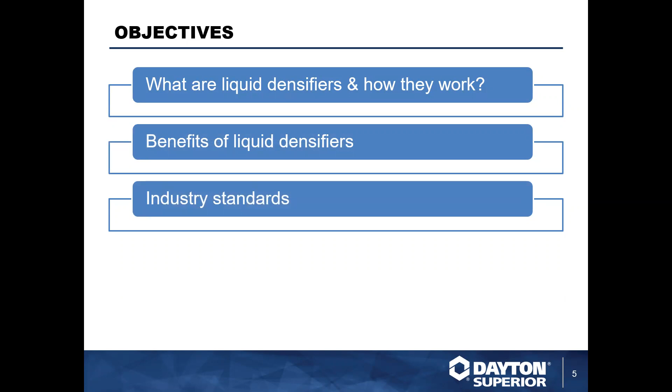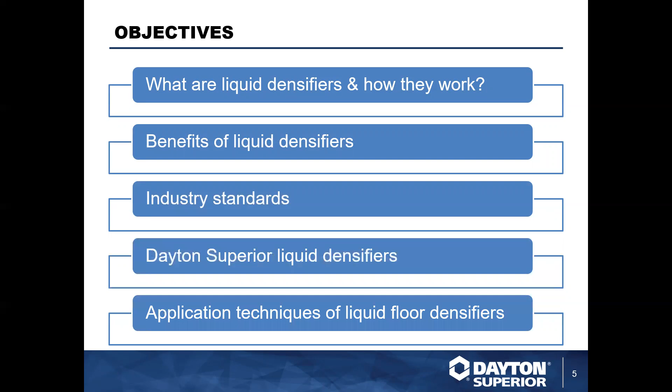We're just going to cover what liquid densifiers are and how they work, just to get the nomenclature out there and figure out what we're even dealing with. What the benefits are, and maybe compare them against one or two of the other product lines that might be out there for the same type of applications. We'll discuss industry standards briefly—there's not a whole lot of them out there, but there's some really good guidance. And finally, the products that we have that we can supply to the market to give you great solutions for your application. There are different types of products out in the market, and they have different types of applications. We're just going to briefly cover what they are so you can have a little better understanding.

So what is a densifier? At the basic level, it's a product or chemical applied to the concrete. It's going to soak into that concrete, react inside of it, and seal off the surface because we're closing off capillaries and pores. It's going to harden it, lock up a lot of the dust and prevent it from getting chalky over time. It does a really good job with exposed surfaces.

How does it work? You're going to see a lot of different silicates here in a minute: potassium silicates, magnesium fluorosilicates, sodium silicates, lithium silicates, colloidals, there's a bunch of them out there. All we're trying to do is get a silicate inside that concrete to react with the calcium hydroxide, or what some people call free lime, in the concrete. That calcium hydroxide is a principal byproduct of the original hydration of the concrete.

So if you're like, hey Matt, will these products work on brand new concrete? Yes. Will this work on concrete that's been down for 5 years? Yes. Will it be effective on concrete that's older? Yes. That calcium hydroxide is still in that concrete. It's still available, and if we introduce a silicate to it, it will react.

What it does is produce more of the spiky crystalline structure that gives concrete its strength. It soaks into that concrete, and the depth of its effectiveness depends on the porosity of the concrete. If I've got ground, open, porous concrete, I'm going to get more absorption into the concrete. If I've got a really tight troweled surface that's brand new, I'm going to use less product, but I'm going to have a really good, effective layer on top.

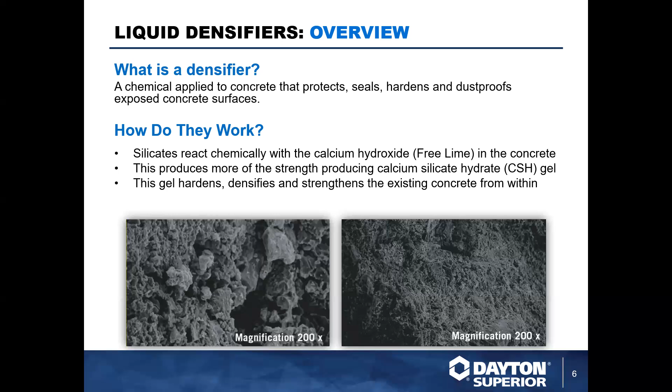As I mentioned, there's a lot of different chemistries out there. Some are a little bit older, some a little bit newer. The magnesium fluorosilicates and siliconates might be a little bit older. Sodium silicates have been around forever, sometimes you'll hear them called water glass, used in different industries. You've got lithiums that were developed in the 90s or so, and then there's a lot of colloidal silicates getting out in the market now.

Dayton offers 3 different types of densifiers: a sodium silicate, a silicate siliconate blend, and a lithium silicate. You'll see on the right-hand side the purple, green, and light blue circles in that square. This is just an oversimplified comparison, and this goes into how they're applied and why they're applied certain ways. You'll see that the potassium is kind of a big, fat, round molecule.

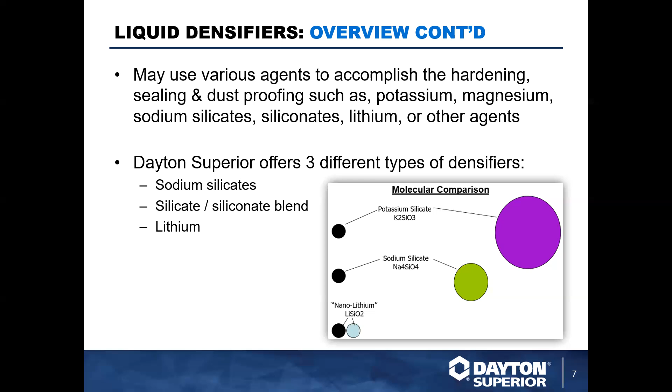Comparatively speaking, it's going to be a little bit more difficult to soak in or get into that concrete, so we might have to help it a little bit, maybe break some surface tension to work it in. Sodium silicate's pretty basic, you spray it on and it gets into the concrete, whereas the lithium is so small that it penetrates much, much easier, much better with lower effort. But that's kind of a basic level of why there are different styles out in the marketplace.

So again, concrete's a hard sponge. If you look at it at a microscopic level, there's capillaries and pores as I mentioned. If you just take regular old concrete and pour water on it, it's going to go down, diffuse, and work its way through it. This is representative of maybe a hard trowel piece of concrete. You're not getting a lot of good reflectance out of it because you're getting refracted light. Even if it's smooth concrete, you're not getting a lot of reflectance, it's being refracted because the light's bouncing in different ways.

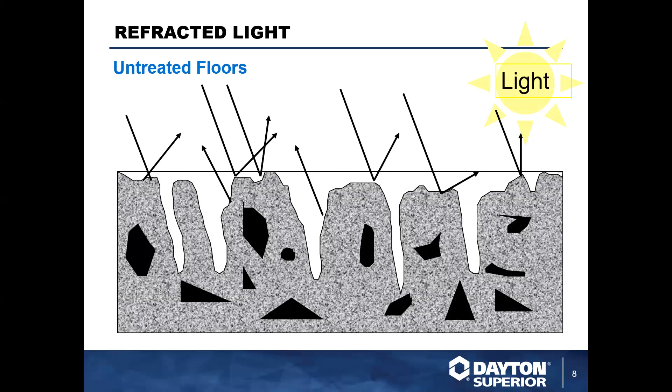The goal is to react inside of that concrete, fill all those little gaps up, and then you can even come back later and polish it, hone it, and have that light being reflected. You'll see some examples here in a little bit of a really good distinctness of image, a high shine, so to speak.

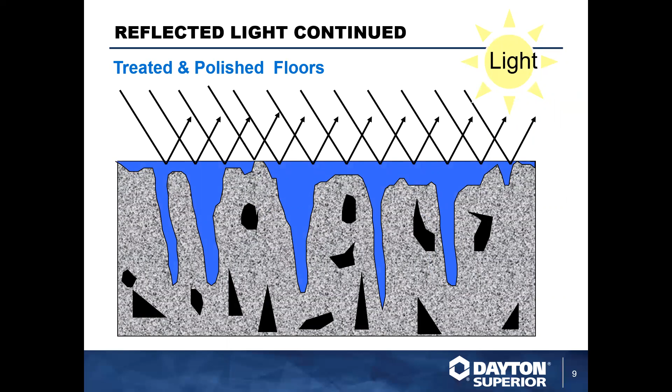What are the benefits? Why are we even using these? If you're looking at a piece of concrete or a floor that's going to be in use for a long time, there's a lot of different options for sealing concrete. Some of the basic ones are topical acrylics. They're really nice products, they get sprayed down and sit on top of that concrete to protect it. Problem is they're a maintenance issue, after a couple years they're a wear item. They're going to wear, tear, and be abused. You have to reapply them.

Epoxies are great and phenomenal, they're also expensive, and they act as a vapor barrier, so you have to have a moisture barrier underneath it, and a lot more considerations there. They're a little bit more expensive to apply and not good for all applications. Water repellents are great for outside, but are you really gaining a lot of benefit inside?

So a densifier style product really fits in a really nice niche as far as sealing and applying to concrete for internal service or application. And again, we talked about this - it reduces the porosity, so you're closing off all those pores.

While you might get some topical staining, it's a lot easier to clean. You're not getting a lot of penetration. And as a matter of fact, a lot of times you can get a really decent beading or rejection of water at the surface. Because we've got that crystalline, spiky structure giving it strength at that near surface, you're now going to be more scratch and abrasion resistant. Dragging stuff across it, you're not going to tear it up. You're not going to wear, tear, and abrade it as much as you would on a normal concrete surface.

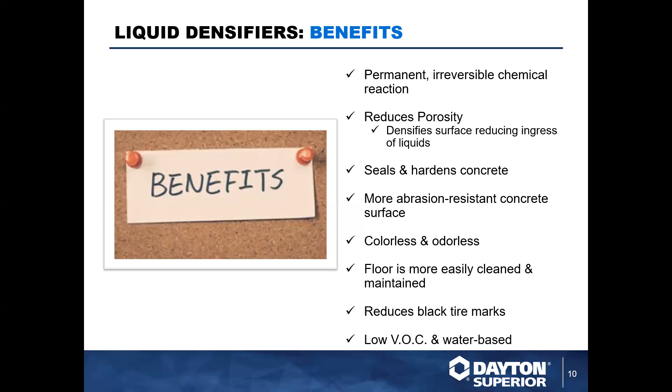I've got some pictures later on showing black tire marks. If you've got, let's say, a forklift, warehouse area, or anything with hard pneumatic tires, acrylics love to show black tire marks. So we've got a good example of that. Being that it's bare concrete, it doesn't do it as much.

So where are we using them? Warehouse floors and big box retail floors absolutely love these. A lot of the big warehouses that are coming out, especially tilt up, you're seeing them using just a straight densified floor. It makes it easy to clean, keeps the dust down, not a lot of maintenance on it.

Big box retail stores - if you walk into some of these great big stores and it's like a nice shine on the floor, you walk in, it's clean, it's shiny, you got the light distinction coming through. A lot of times what they're doing is they're specifying a good cure, they're densifying it, then they're polishing that product out. So they just got clean, bare concrete with a really high reflectance.

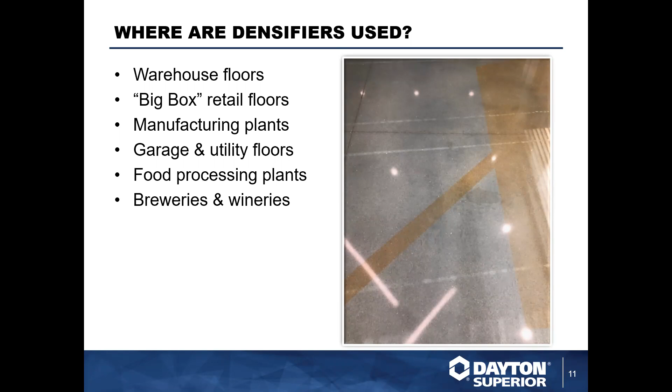Manufacturing plants, incidental food contact, all these products qualify for that. It also keeps it easy to maintain. Garage utility floors - we've had a lot of automotive restoration type places use these type of things, not as much to maintain. Also breweries, wineries, auto dealerships, schools.

And what you're seeing here is actually a school where they did a decorative finish. They had nice concrete, they went through and dyed it, stained it in a particular pattern, and then they densified it and polished it out, and it looks really good.

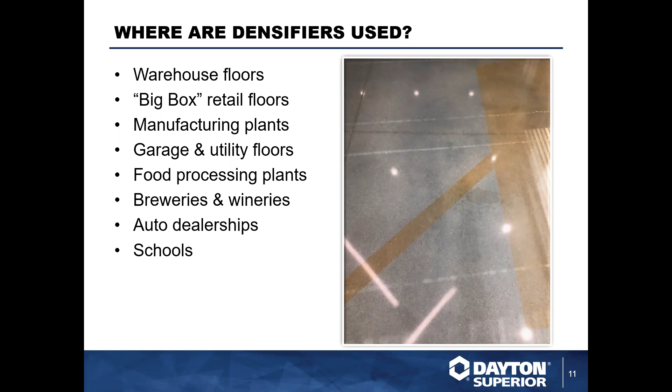And as we're talking, you'll hear me say maybe sealed or polished or honed or ground. There's not a lot of industry standards around densified concrete. ASTM, who normally does a lot of the standards and testing methods, there's no apples to apples comparison testing through them. Now, while it's actually in debate and in progress right now, it has been for a number of years - there's standards being developed, but they're not out there yet.

But there is the Concrete Polishing Council, and they put out a really nice statement saying, hey, there's a difference between polished and sealed. I can seal my concrete with the densifier and reduce ingress materials, lock up the dust, make it more abrasion resistant. But when we're talking about polished concrete, we're talking about more of an architectural finish. And that's going to include a lot of extra work between grinding, honing, and polishing that concrete, just like you would almost sharpen a knife.

Or even as sanding wood - there's a lot of, to get a mirror finish or get a high gloss finish or a very smooth finish, it takes multiple steps and multiple levels. Everything from grinding from metal bonded to resin bonded and going up your different levels of refining diamonds. There's a lot to be done there.

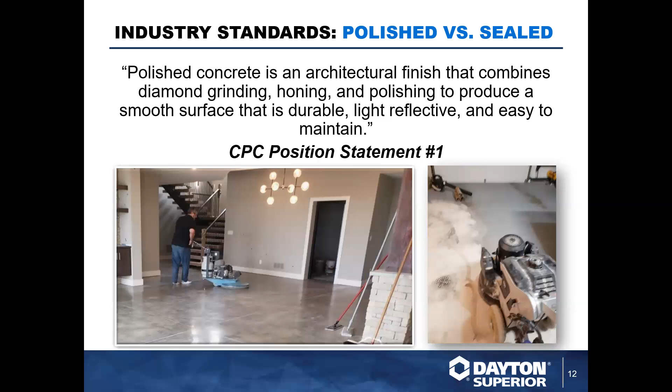The Concrete Polishing Council also has really nice standards to kind of get people talking in the correct language. Really straightforward, pretty easy to understand. They've got an exposure chart and they also have a polish chart or appearance chart. And so that way, if you say, hey, I want a salt and pepper finish...

Well, you can say I need a class B finish. And you'll see on the illustration on the left, you've got what's called a cream finish or a fine finish. That's where when you're finishing the concrete, you bring up all the cement fines. It's real creamy, smooth, and it's going to be very consistent. Once you start grinding down through that, you're going to start seeing more of the sand.

That sand is going to be more of what they'd call a salt and pepper finish. And then you'll see a coarse aggregate if you burn through all that, where they tamp down that larger aggregate. You'll see a lot of Class C finishes, especially on retrofits, where maybe they're taking a building, putting in a new restaurant or shop, and they pull out old tile, VCT, carpeting. They grind through all the acrylics and lamination down to the stone or rock, and polish it out that way.

Then on the other side, the appearance, right? Do I just want flat, clean concrete? I don't need anything crazy going on here.

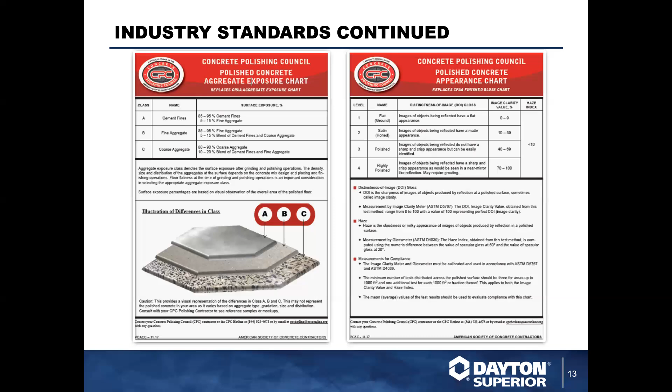That's fine. There's an image clarity scale of 0 to 9. You don't want it to be very hazy, it just looks good. As opposed to a satin polished or highly polished finish, you've got increasing levels of image clarity coming off that concrete. So instead of seeing a big blob of light above you, it starts cleaning up and the image clarity becomes like, oh, that's a can light, or I can see the light bar, as opposed to just a big hazy area. That's often measured with a reflectometer. There's specialty tools you can use, so it's a defined tool giving you a defined value to meet a defined specification. It's really nice that that's out there.

So how can we help? What kind of products does Dayton Superior carry?

There are different levels of densification. The first one is a good basic option, hey, we're going to apply it, lock up the dust, make it a little easier to clean, but we don't necessarily need to polish it because we might do something later down the line. That would be our Densifier J13.

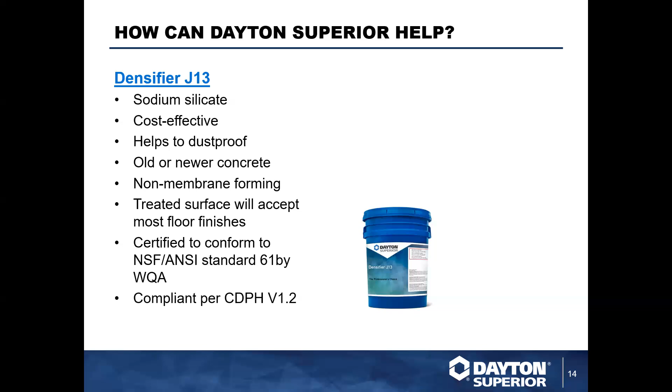It's a commodity level sodium silicate, good for all day, everyday use. Use it on old concrete, newer concrete. It's been tested against the NSF 61 standard for potable water, and against CDPH version 1.2, which is for indoor air quality for LEED applications. The benefit is, if I've got softer concrete, or if I sweep and come back the next day and it's still dusty, I could use this. It'll help mitigate that, and it will still accept glues, mastics, adhesives the next day. I can still do something on top of that concrete without worrying that I took away all the porosity to where my glue, adhesive, coating, or topping won't want to bond.

Its companion product, the Densifier Concentrate J12 - it's expensive to ship water, right? So this is a concentrated version of the J13. If I need to ship it long distances, on the job site I can just add water at the correct ratio and I've got a good product to use.

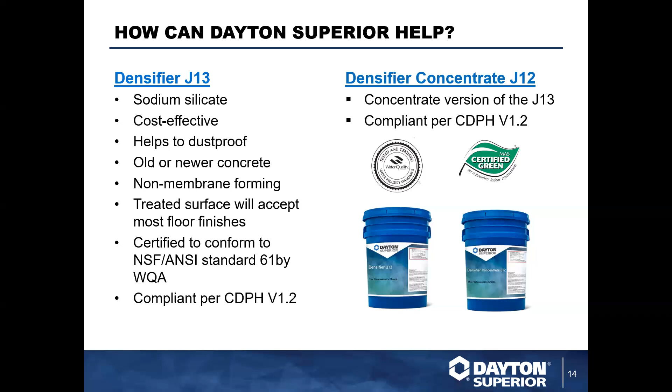Sure Hard Densifier J17 - this has been an excellent product for us, used for decades in polished concrete and densified floors. We had it tested against MAS Certified Green CDPH 1.2 for LEED certification or indoor air quality compliance. It's what we call a scrub-in installation, which we'll cover in a bit. These floors polish up, they'll look really good, and they're very good at rejecting water. It's been used on millions and millions of square feet, and it's a very good product.

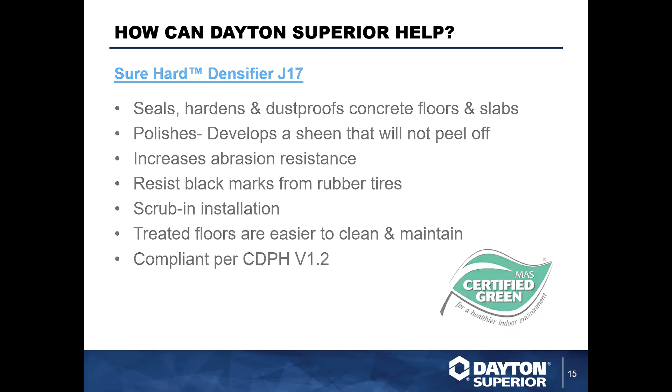On the newer scale, the lithiums, we've got the PENTRA-HARD Densifier. It's a spray down, much easier application - just mop it in if you've got any puddles. This product is compatible with newer concrete, and I'll discuss that in just a moment. Again, all of the densifiers can be used with colored concrete. It's a pretty easy application, we'll just spray it down. But in this case, we'll use it with new concrete in conjunction with the membrane-forming curing compound.

The lithiums are easier to use on newer concrete, and you'll see some densifiers are used on new concrete. We like to default back to industry standards because they're there for a reason, and they protect concrete and prevent crazing, cracking, and other issues. So cure your concrete with a membrane forming curing compound. We've found that the PENTRA-HARD densifier works very well on hard trowel burnished concrete, followed up by the densifier - once that's applied and dried in, put your cure on it the same day. That way, for fast track or tilt-up applications, it's a very easy way to accomplish a few steps in essentially a day.

We've got a success story here where it's been used with warehouses. They hard troweled it, put the densifier down immediately after they got the hard trowels off, and once that was applied and dried in, they put the cure on top of it. That cure was then used with the bond breaker application and had no problems. They were able to lift, place, complete, and when they cleaned the cure and any residual bond breaker off the slab, they were left with good, clean, sound concrete that was already densified, and they were able to walk off and go.

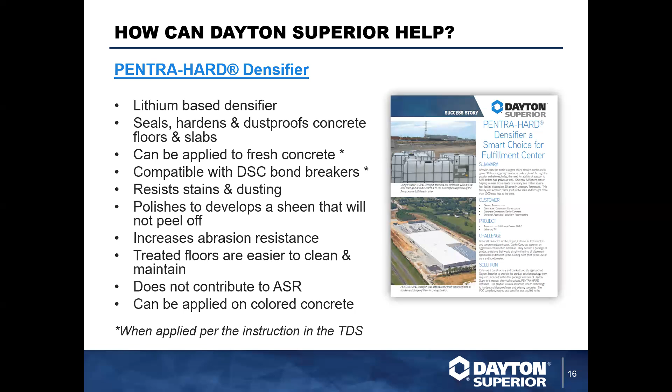PENTRA-HARD Guard, that's the companion product to the PENTRA-HARD densifier. This is what you would call a micro coating. It's going down somewhere in the neighborhood of 1,500 to 2,000 square feet per application. It's a very, very light, very thin application. It's part of what we call the durable floor system.

While the densifier does a very good job rejecting, this product will do a very good job beading. So let's say I have fresh concrete that's been densified, I put this on there and drop water on it, it's going to bead up like a freshly waxed car. It's going to have a really nice beading effect.

It helps reduce any incidental staining at the surface. And the other benefit, and you can kind of see it in that brochure, once you apply this, you can buff it in and buff it out. As you put that burnisher on it or buff it, it will develop a low sheen on that concrete. So it's a way to cheat up a sheen or a shine without having to go through the polishing process.

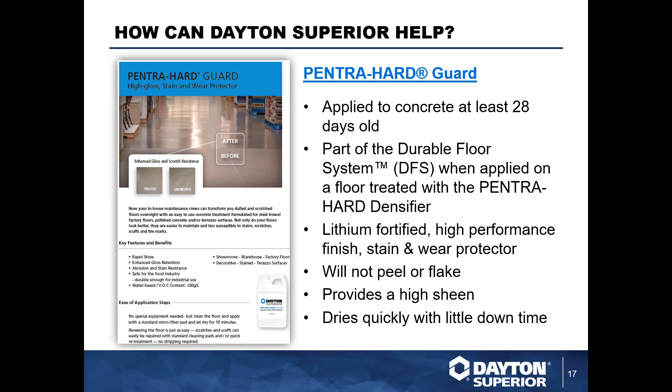Then we have the PENTRA-HARD finish. PENTRA-HARD finish and PENTRA-HARD Guard are very similar, except the finish has a much higher solids content. So instead of having to do 2-3 coats with the guard, you may be able to get by with 1 coat of the finish. Just a higher solids product. Again, it's part of the durable floor system. You could use either the guard or the finish to accomplish that.

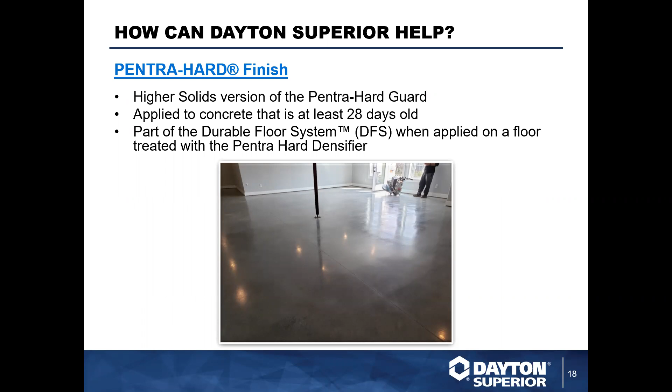Just to have a brief discussion on the densifiers and how they're applied, we talked about the J17 being a scrub-in style densifier, and there are a bunch of them on the market, but to give you an idea, you are going to flood the floor with the densifier. I'm literally pouring it out kind of like you see here. You want a standing head on top of that surface, and then you're going to spread it around with a broom. We want a good uniform coating of the densifier on there.

You want it to be wet, and you don't want it to dry. So what you're going to do is pour it out, spread it out, and then keep it wet, keep it from drying out. As that stays wet, you're going to probably work that material for the first 15, 20, 30 minutes. And when I say work it, mechanical scrubbers work really well, ride-ons, soft brooms, bristles, all that works.

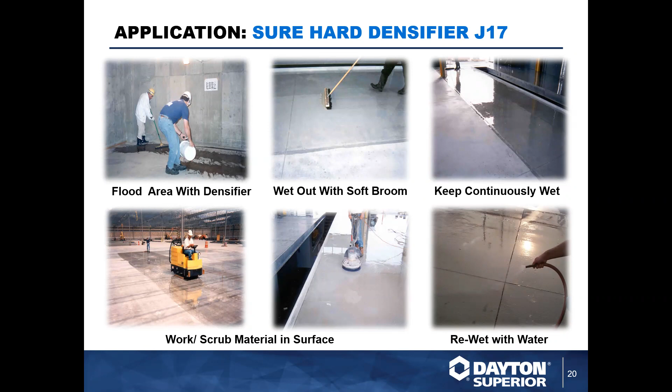After about 15, 20 minutes, it's going to tend to thicken up a little bit. It's starting to react, starting to do what it needs to do. We're going to keep it wet, keeping that product wet, and then we're going to work it for about another 5 minutes. So we've flooded the floor, we're going to work that material in, breaking the surface tension, helping that absorb in as much as it possibly can.

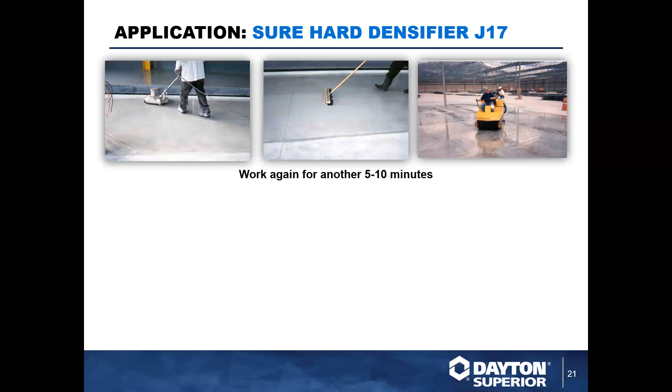As it thickens up, we're going to re-wet it, and then we're going to rinse it off. It's a little bit of an exaggeration, but you just don't want dried material on the surface, because we want this product to react inside the concrete. We don't want to see it. You shouldn't be able to look at a piece of concrete and say, that's densified and that's not, without having to do a little evaluation to it. So if you're using a colored concrete, you don't want a haziness on it. So you just rinse it, squeegee it, rinse it again, and you're done.

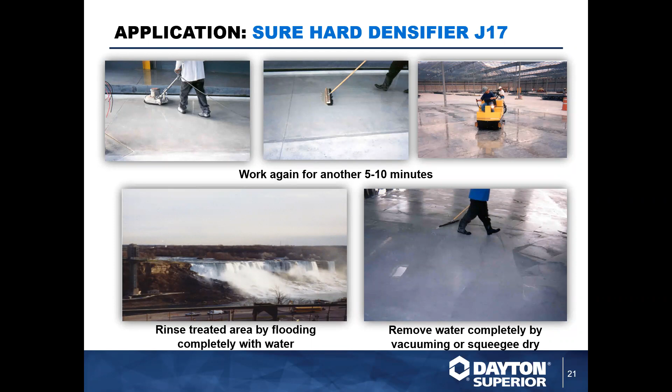Here's a really nice picture, I mentioned it earlier, of a warehouse that had an acrylic cure and seal on it. During the build out phase, they said, hey, we're going to put an acrylic on here. It's going to be great. It's going to protect the concrete. And over time, you've got fork trucks on it, right? Hard black rubber wheels, a lot of pivoting, a lot of turning, and it makes the floor look dirty, right? And it's very hard to clean that.

Acrylics are cleanable. You can clean them, you can remove them, and you can replace them. Or in this case, you can strip it, apply a penetrating densifier, and you can already see the massive difference between them, right? You've got a dark, dingier floor with that acrylic that's still there and still protecting, just not attractive, versus something that's going to reflect a little bit more light and look a little bit nicer. The reflectance also increases the light in that facility.

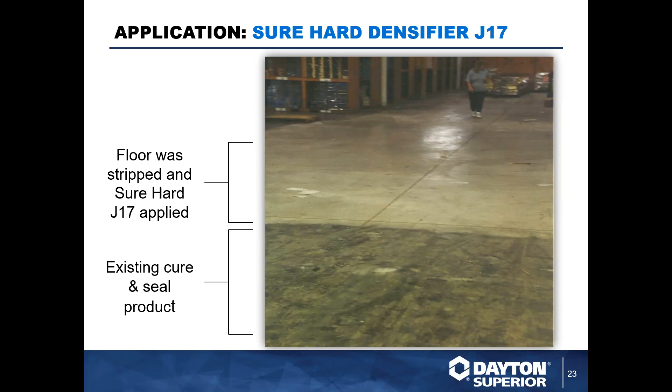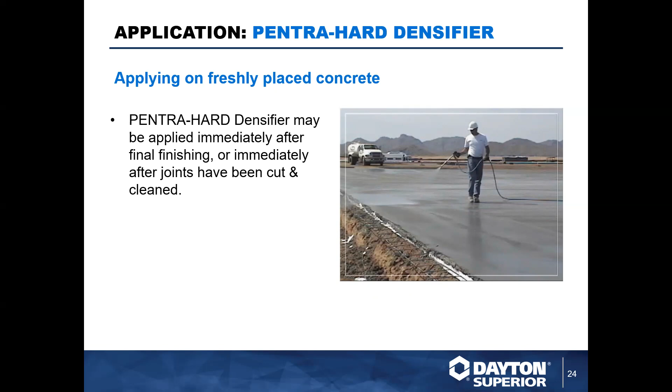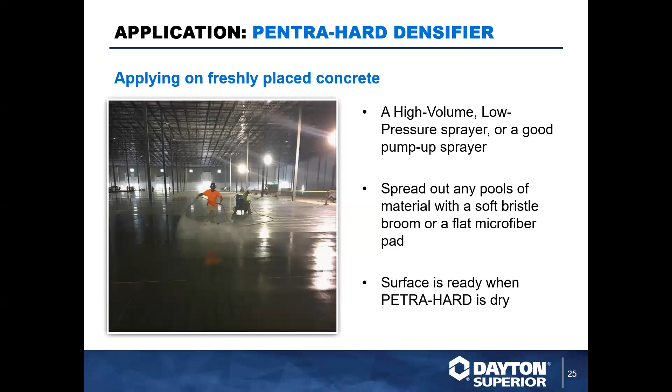If there's any light puddles after about 15 minutes, take a soft broom or a microfiber mop and move the product around or move it off. Again, we don't want to leave puddles of material on the surface to dry. We want that product to react inside that concrete. And once the densifier is dry, once that concrete is dry, it's ready to go. In this case, after you apply the densifier, we'd recommend applying a cure. And here's a really good example of that as well.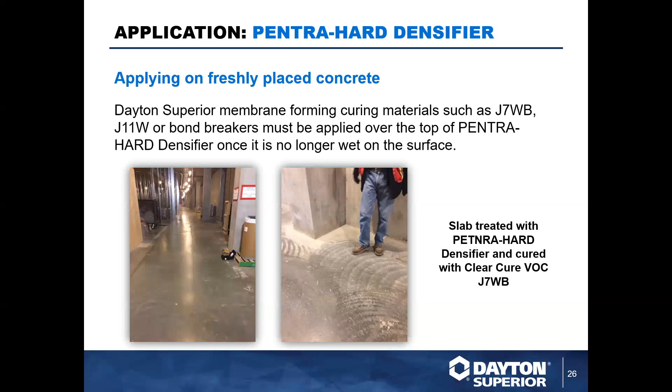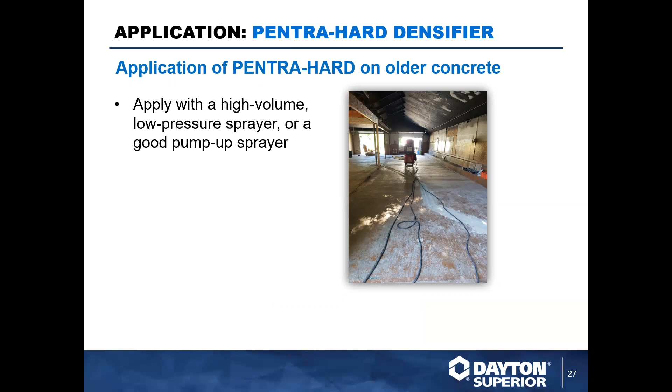I told you older concrete still works too. This is a couple pictures of older concrete or restorations. This was a project where they had an older building. They stripped out the old carpet and tile, and you see all that mastic and adhesive on there, real ugly. They went in there with grinders and ground all that out.

They started applying it with a high volume, low pressure sprayer. They spread out any pools of product, and you can see they've ended up with a very nice, very attractive polished concrete floor with a really good sheen. In this case, that would be like a Class C where you're starting to see the larger aggregate. And again, once it's dry, they can start moving their desks, equipment, everything back in.

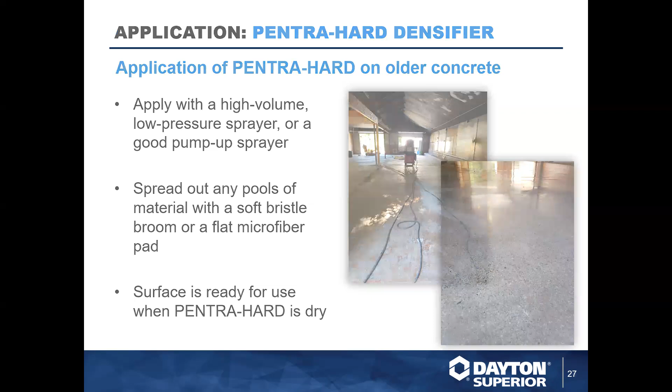Durable floor system, again, mentioned that earlier. That's the PENTRA-HARD in addition to the guard. We've got a couple really nice brochures available on our website. Here's a couple nice applications of that.

This is a church application. They wanted to make their basement look a little bit nicer, cleaner, easy to maintain, low odor, but also on budget, right? You can see in the upper left-hand corner, not very attractive, kind of dusty, kind of dirty. They went in and cleaned it really well, did some auto scrubbing. They applied the PENTRA-HARD densifier, let it soak in, and cleaned the whole thing out.

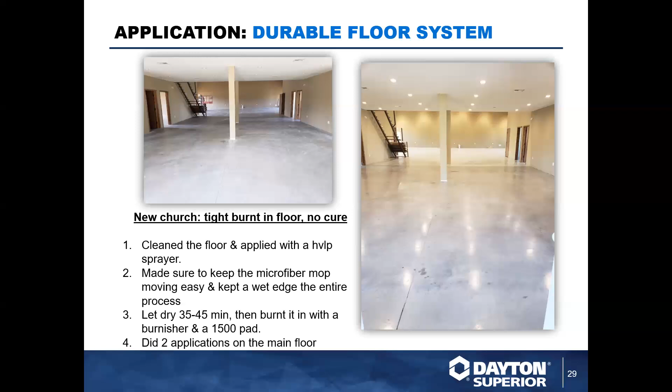They ran a burnisher with a 1500 grit pad over it to get any laitance off. They applied the guard, burnished that back in, and ended up with really nice reflection. You can see a good distinctness of image here, where each light is being reflected into that floor.

And even on a residential application, we had a customer come in and say, "Hey, I'm my own GC here, right? I'm building my house, and I want a really good option. I don't want to have anything crazy down. I might have some throw rugs, but I want a good, durable finish that I don't have to maintain to the point that I have to strip and reapply." So we looked at the options. They went with the PENTRA-HARD, and they applied it themselves.

And you can kind of see this upper left-hand corner. It's a little dirty, right? It's a construction site. You've got sheetrock, mud, dust, dirt, debris, clay being knocked in, drug in. So they got a swing scrubber. They cleaned it really, really well. They densified it. They came back over it, put the guard product down, a couple coats of that, and then they burnished it back in.

And you can see you've got a reasonable looking floor here, but a good side to side is the top left is in front of the fireplace. Top right is in front of the fireplace as well. Right, pretty massive difference there, and it's a good product that's held up well for them, and they were very, very happy with it.